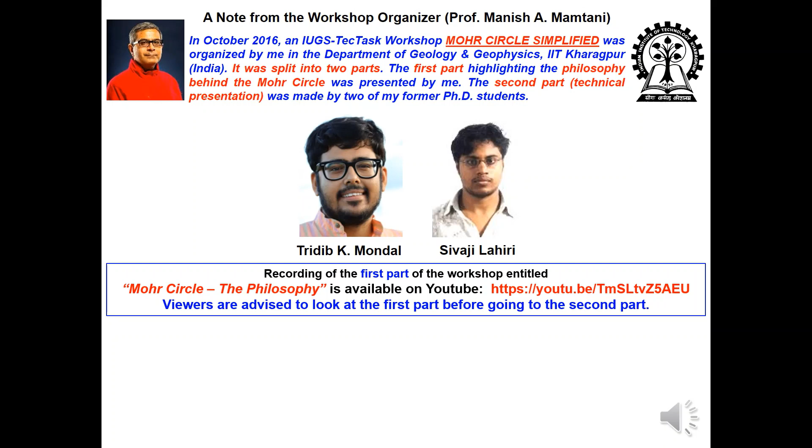Recording of the first part of the workshop, entitled Mohr Circle: The Philosophy, is available on YouTube, and the link is given here. Viewers are advised to watch the first part before the second part. This present recording deals with the second part, Mohr Circle Simplified, with detailed presentations by Tridib Mondal and Sivaji Lahiri.

The viewer is informed that Mohr Circle Simplified was one of two workshops originally held at IIT Kharagpur in October 2016. The workshop manual is open access and can be freely downloaded from ResearchGate. This recording was done in September 2020 for the benefit of students and the geology community in response to increased online teaching due to the COVID-19 pandemic.

In these four years since 2016, a lot of research has been done by present and former members of the Fabric Analysis Lab in the Department of Geology and Geophysics, IIT Kharagpur, as well as by other researchers worldwide on various aspects related to the Mohr circle and its applications. However, the present lecture deals largely with fundamental concepts and has been kept unaltered.

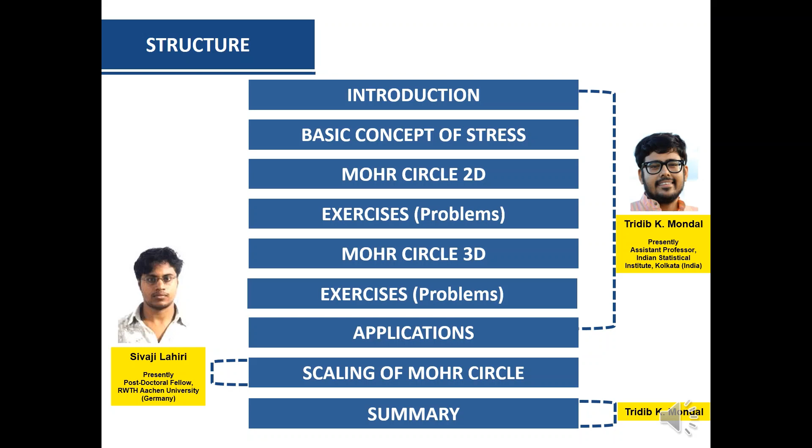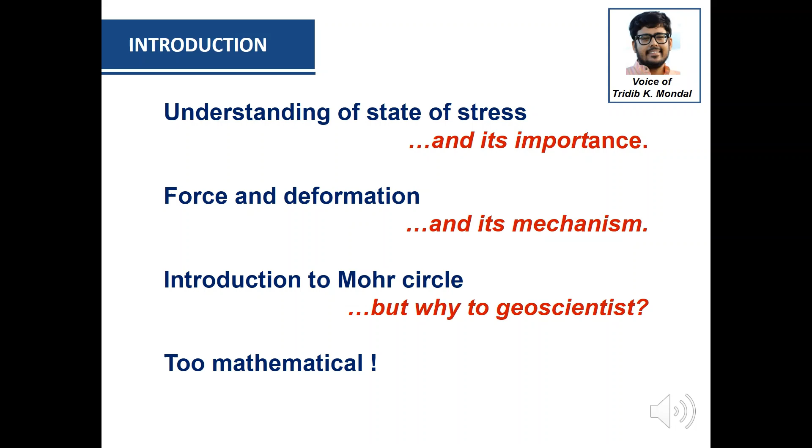Now coming to the introduction part, it is very important to understand the state of stress and its importance. When we talk about the state of stress, it is essential to know about force and deformation. Here we will introduce the Mohr circle. Now the question is, why is it important to geoscientists? In this lecture we'll try to find the answer to these questions. Some people think this is too mathematical, with lots of equations. Yes, there are some equations, but it is very important to understand the physical significance of these mathematical equations.

Now coming to the basic concept of stress. The Mohr circle, as I was telling you, is a graphical representation of any state of stress within the crust of the Earth. It was developed by German scientist Otto Mohr in 1882, after whom the graphical method is now named. So it's a graphical representation of normal stress versus shear stress.

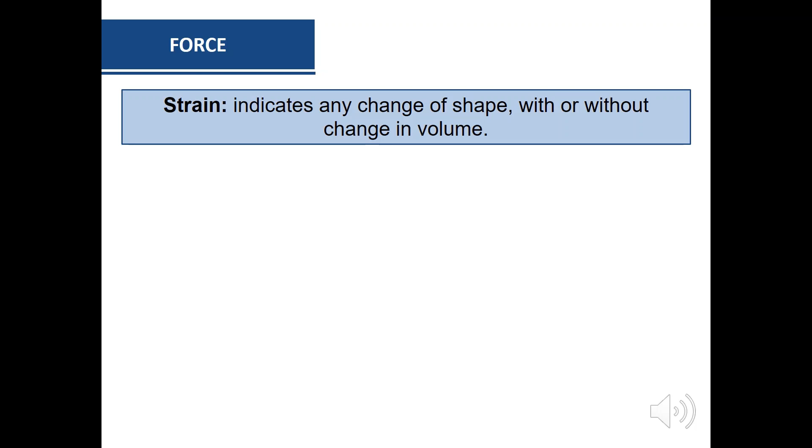Now coming to force or pressure. In the field we can't see the force or pressure directly, but we can see the strained body. Strain defines any change of shape. It may incorporate volume or it may not. If it incorporates volume, then we call it volumetric strain. So it's basically a change of relative position of particles in rocks in response to force.

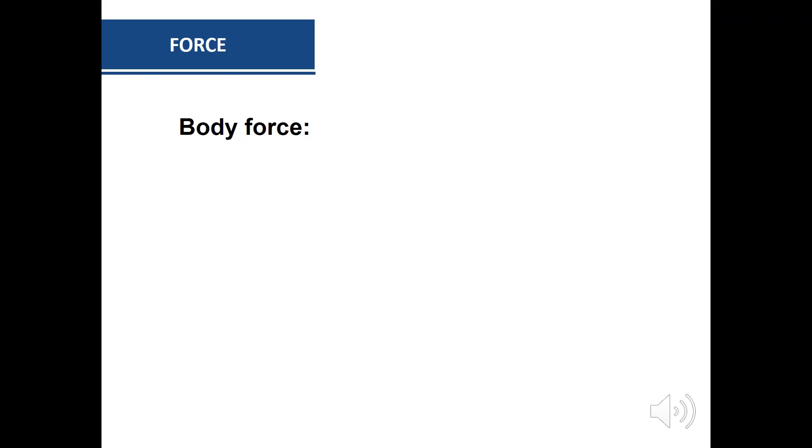So force is the main culprit. Force is defined as any pull or push applied to a body or material. Now coming to force, there are two types: one is called body force and another is called surface force. Body force defines the three-dimensional forces.

Body force affects every particle of rock in a volume, and its magnitude is related to its mass. You can consider gravity and magnetic forces as part of body force.

Now coming to surface force, it acts on the surface in the body. It results from the action of one body on another across a common surface.

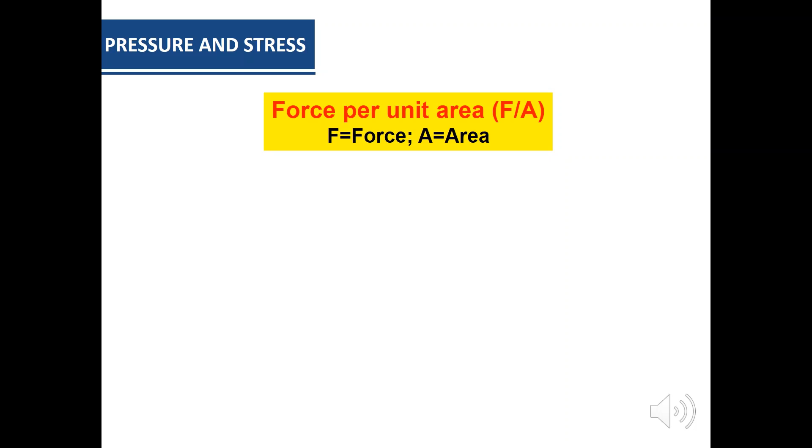Now coming to pressure and stress. As you know, pressure or stress are almost similar and both are defined by force per unit area. But there are slight differences between them. Pressure is used for materials with negligible shear stress, such as water or oil, whereas stress is used for materials with considerable shear stress, such as rock.

So to understand rock deformation, it is essential to understand this concept. Now coming to the units of stress, normally we express stress as Pascal, bars, or kilobars.

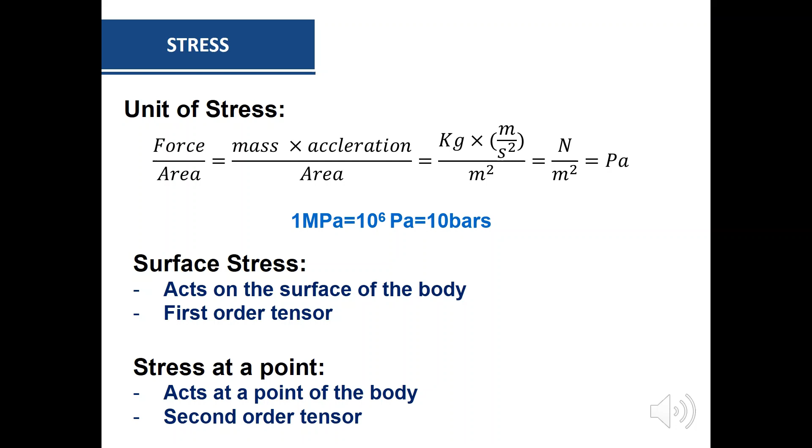Now there are two important terms: one is surface stress, and the other is stress at a point. Surface stress acts on the surface of the body and is considered a first order tensor, while stress at a point is defined when the stress is acting at a point of the body, and it is defined as a second order tensor.

Now, stress on a surface. Stress on a surface is a vector quantity, normally expressed by the symbol sigma, and can be expressed as the ratio between force per unit area across which the force acts.

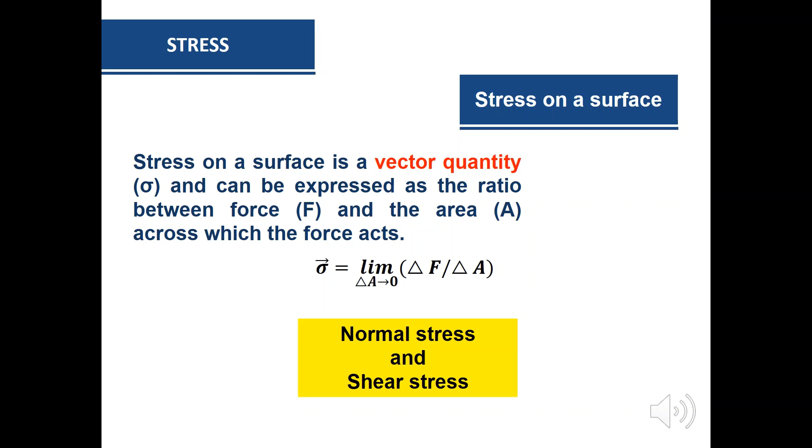So any force has two components: the normal stress component and the shear stress component. Normal stress and shear stress can be expressed as a function of theta, the orientation of the plane on which the force is acting. The normal stress, sigma n, is expressed as sigma cos square theta, while the shear stress, sigma s, is expressed as sigma sine 2 theta by 2.

So here the force F is acting on the plane, and the inclined line in that figure is a fracture plane. If we resolve the normal stress component and the shear stress component, and rearrange all these equations, we get the normal stress sigma n and shear stress sigma s as a function of cos theta and sin theta respectively.

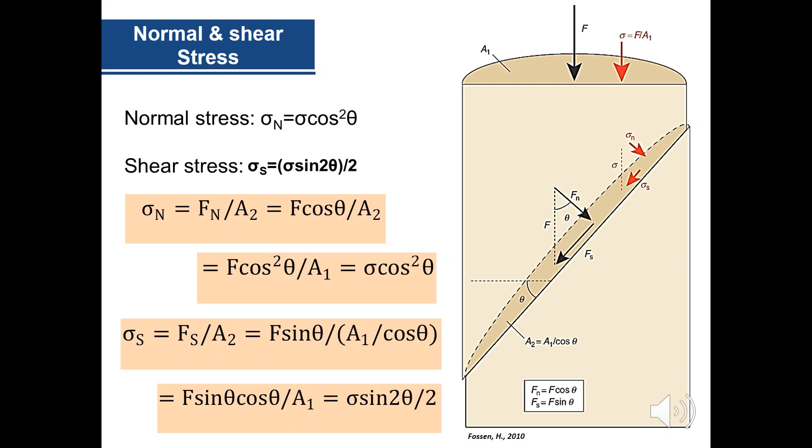Now there are some sign conventions, important to understand before the Mohr circle. From a structural point of view, we consider compressive stress as positive, while extension or tensile stress is negative. Anticlockwise rotation we consider sinistral and positive, while dextral, clockwise rotation, we consider negative.

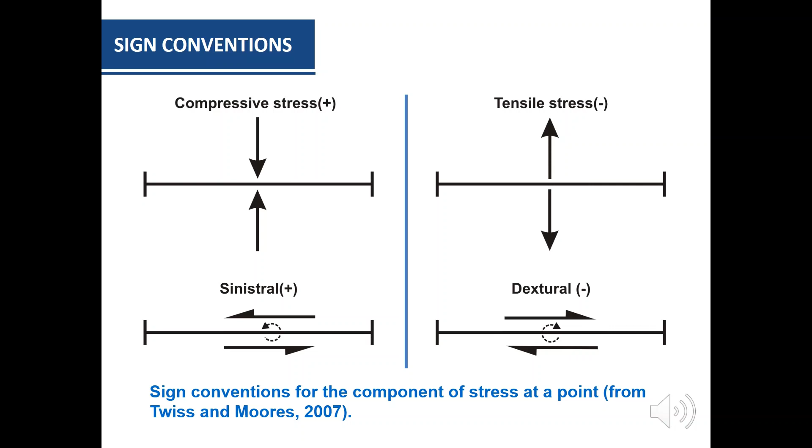Now, stress at a point. Stress at a point is expressed three-dimensionally. It is considered that stress components act on each surface of a very small cube, and each surface has a normal stress and a shear stress vector.

Here is a very small cube placed in x1, x2, x3 coordinates, with normal stresses and shear stresses plotted on each surface. For example, sigma 33 is a normal stress acting parallel to the x3 axis, perpendicular to the x1-x2 plane. In case of sigma 32 or sigma 31, both these stresses are shear stresses, parallel to the x1-x2 plane.

Now, in case of sigma 32, this shear stress acts on the plane which is perpendicular to the x3 axis and parallel to the x2 axis.

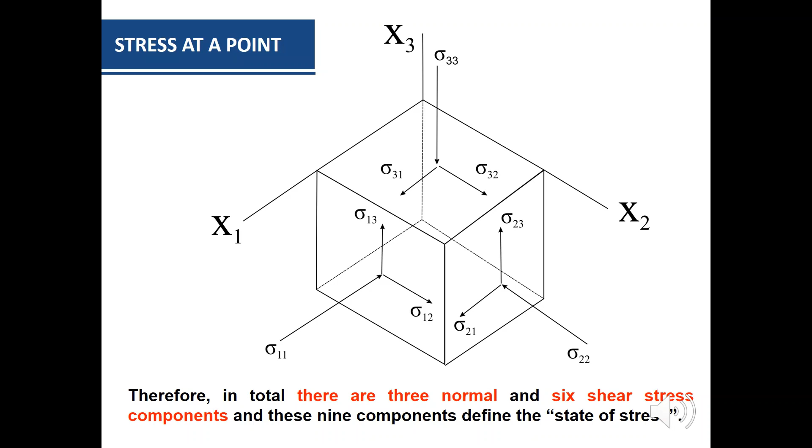Similarly, for sigma 31, this is the shear stress acting on a plane which is perpendicular to the x3 axis but parallel to the x1 axis. Similarly, sigma 23, sigma 21, sigma 13, and sigma 12 will be expressed. By resolving all the normal stresses and shear stresses acting on this very small cube, we can obtain these 9 stress vectors, represented by this stress matrix, normally denoted sigma ij.

The diagonal components of this matrix are the normal stress components, that is sigma 11, sigma 22, and sigma 33. All other 6 components are considered shear stress components.

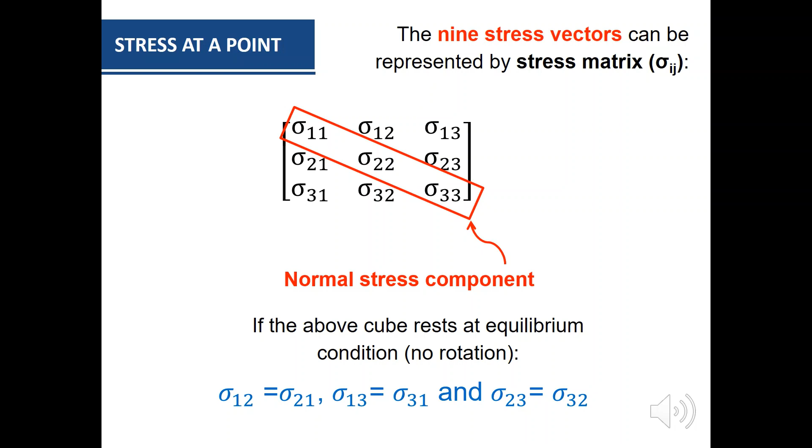Now consider the situation where the cube rests at equilibrium, meaning it doesn't suffer any rotation. In that case, we can write sigma 12 equals sigma 21, sigma 13 equals sigma 31, and sigma 23 equals sigma 32. So there are 6 independent components to the stress matrix, giving a symmetric stress matrix, where changing columns to rows doesn't change anything.

So again, these are the normal stress components. Coming to the principal stress, this is very important.

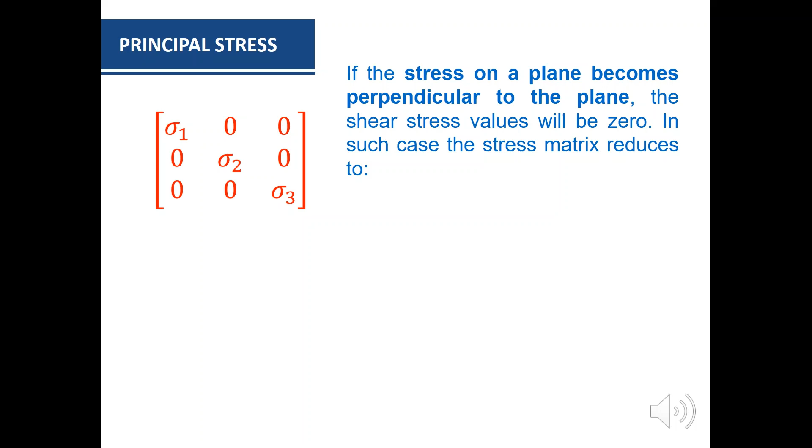If the stress on a plane becomes perpendicular to the plane, the shear stress value will be 0. In such a case, the stress matrix reduces to these components, where you can write sigma 11, sigma 22, sigma 33 - only diagonal axes are there, while the shear stress components are 0. So in the above matrix, sigma 1 or sigma 11, sigma 2 or sigma 22, and sigma 3 or sigma 33 are known as principal stresses, where sigma 1 is greater than or equal to sigma 2, which is greater than or equal to sigma 3.

The principal axes of stress are known as the major, intermediate, and minor axes of an ellipsoid. This ellipsoid is known as the stress ellipsoid.

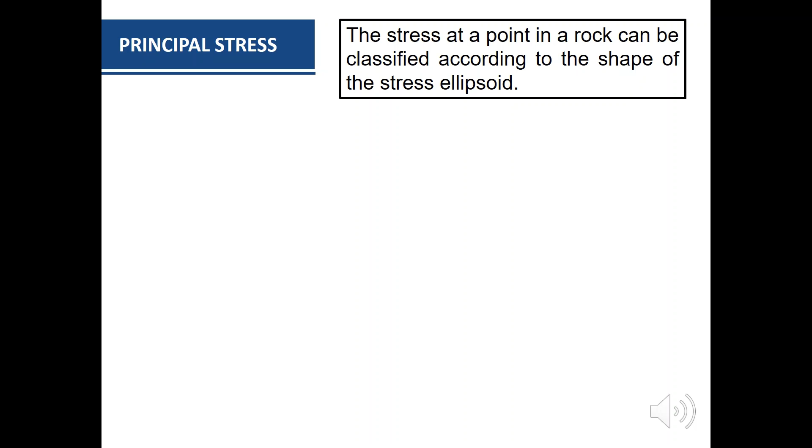Now the stress at a point in a rock can be classified according to the shape of the stress ellipsoid. It could be triaxial stress, biaxial stress, uniaxial stress, or hydrostatic stress. In triaxial stress, it's a state of stress in which all 3 principal axes are non-zero, meaning sigma 1, sigma 2, and sigma 3 are not equal to 0.

In biaxial stress, only 2 principal axes are non-zero while one will be 0. In uniaxial stress, only one principal axis is non-zero while the other 2 axes will be 0. In hydrostatic stress, the stress ellipsoid is a perfect sphere, meaning sigma 1 equals sigma 2 equals sigma 3, and there is no shear stress component.

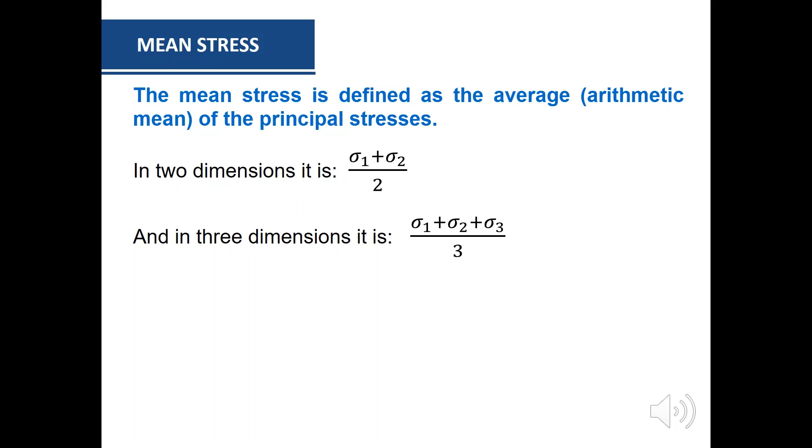Now there is one more important term called mean stress. Mean stress is defined as the average of the principal stresses. In 2 dimensions, it is sigma 1 plus sigma 2 divided by 2, and in 3 dimensions, it is sigma 1 plus sigma 2 plus sigma 3 divided by 3.

Mean stress is independent of any coordinate system, and in the lithosphere, mean stress is equivalent to lithostatic pressure, which can be expressed as rho g h. Rho is the average density of the crust, h is the height of the crust, and g is the gravitational acceleration.

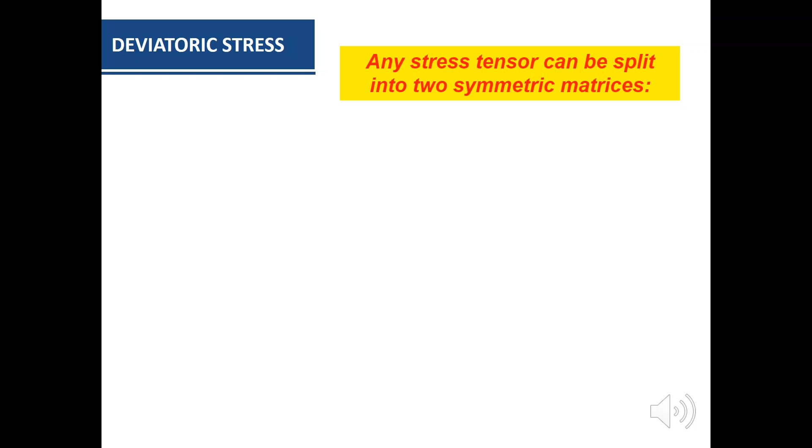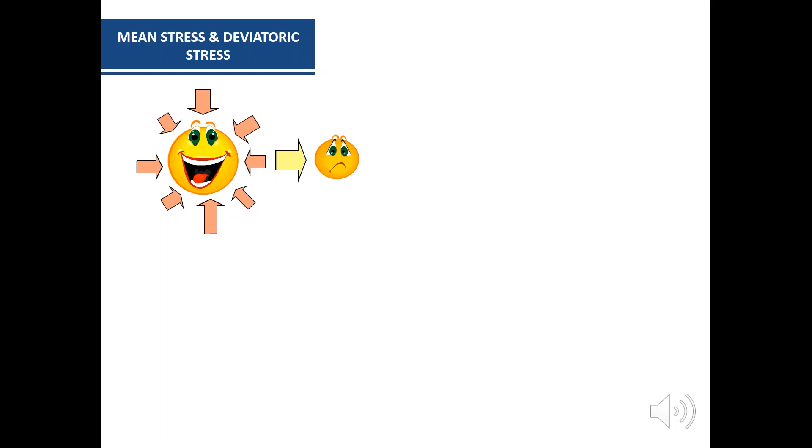Now, what is the physical significance of mean stress and deviatoric stress? We'll try to see from this cartoon diagram. Now, what happens if the mean stress increases? If mean stress increases, shape remains same but size changes.

But if the deviatoric stress increases, then shape changes while size remains same. So mean stress is considered the isotropic component of stress, while deviatoric stress is considered the anisotropic component of stress. The deviatoric stress typically represents the tectonic stress component, while the isotropic component corresponds to the lithostatic pressure. Commonly, the isotropic component is much larger than the deviatoric component.

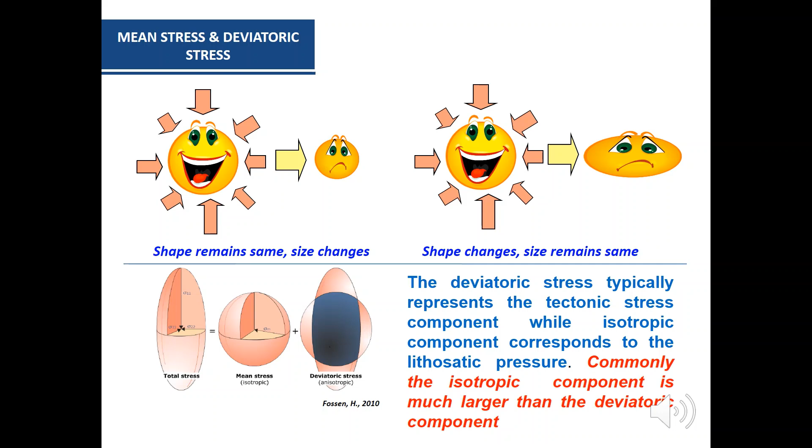So far, we have seen what normal stress and shear stress are, what mean stress and deviatoric stress are, and the physical significance of mean stress and deviatoric stress. Now we'll see one exercise, and this will essentially help us clarify the concept of normal stress and shear stress.

The exercise is given here: a cylindrical specimen of rock with 50 millimeter diameter and 100 millimeter long is subjected to an axial compression force of 5 kilonewton, and we have to determine the normal stress and shear stress on a plane inclined at 30 degree to the radial direction, the maximum values of the shear stress, and the inclination of the planes on which the shear stress is equal to 1/2 of the maximum shear stress.

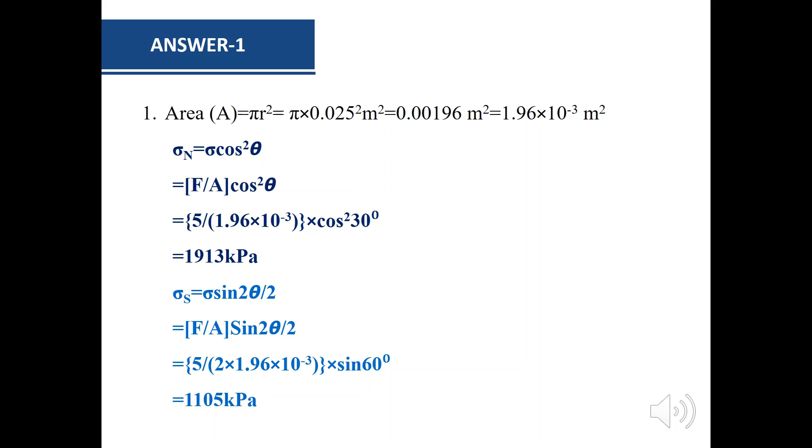Now let's look at the answer for the first one. Normal stress is equal to sigma cos square theta, this is known to us. Sigma is force per unit area, so area we can determine from the given data, and we know theta is 30 degree. By converting all the units, we get sigma n equal to 1913 kilopascal. Similarly, we can determine the shear stress sigma s, that is 1105 kilopascal.

Now for the second part of the question, we have to determine the maximum shear stress. Maximum shear stress occurs when theta is equal to 45 degree. If you put theta equal to 45 degree, we can easily get the value of maximum shear stress. Here we have received that is 1275 kilopascal.

After completing the basic concept of stresses, we will move towards the Mohr circle. First we will try to learn Mohr circle in 2D, then we will come to Mohr circle in 3D. To start with, we have to know that the concept of stress can be extrapolated to understand the state of stress at a point in 3D by visualizing a stress ellipsoid. It is necessary to know the magnitude and orientation of all the normal stress and shear stress on every plane that includes that point. Mohr's circle provides a graphical means of calculating normal and shear stresses and the orientation of a plane in rocks.

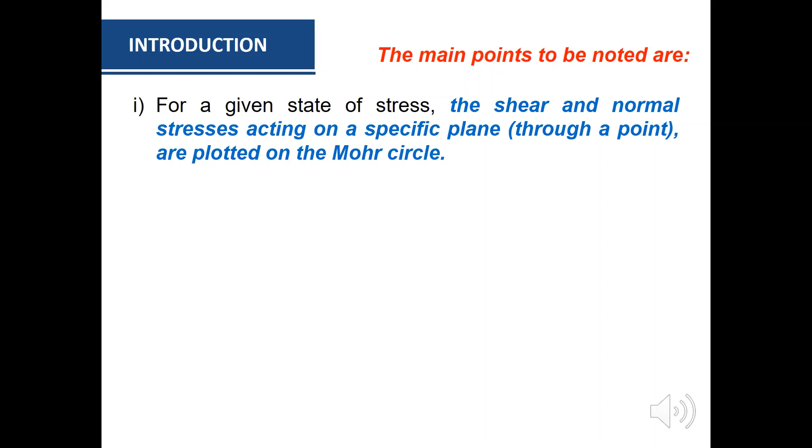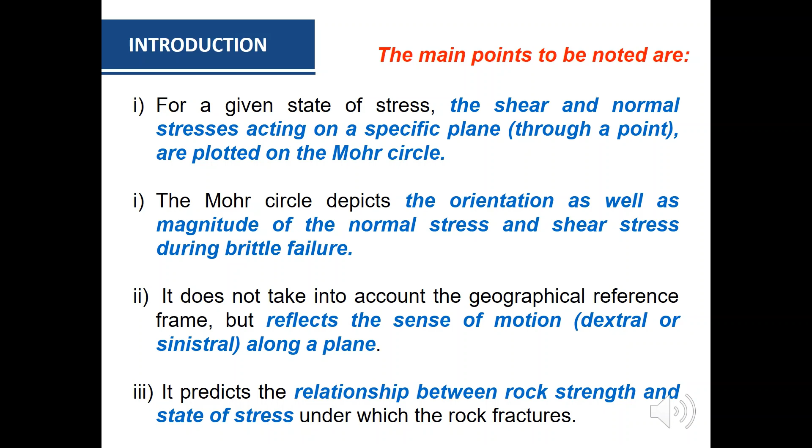There are certain points which are very important and we have to note down. For a given state of stress, the shear stress and normal stresses acting on a specific plane through a point are plotted on the Mohr's circle. The Mohr's circle depicts the orientation as well as magnitude of the normal stress and shear stress during brittle failure. Number 3, it doesn't take into account the geographical reference frame but reflects the sense of motion, either dextral or sinistral, along a plane. And finally, it predicts the relationship between rock strength and the state of stress under which the rock fractures.

The magnitude of stress varies with the orientation and size of the area on which the force is acting, because stress is defined by force per unit area. So to determine the equation of Mohr circle, there are certain assumptions.

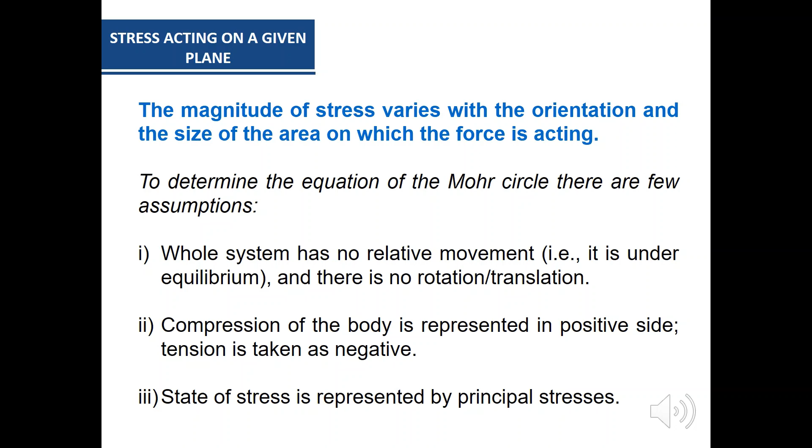What are these assumptions? The assumptions are the whole system has no relative movement, it is under equilibrium and there is no rotation or translation. Compression of the body is represented on the positive side, tension is taken as negative side, and the state of stress is represented by principal stresses.

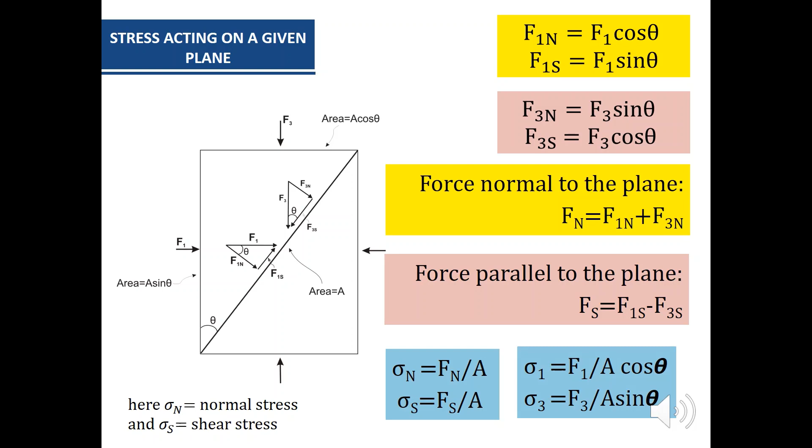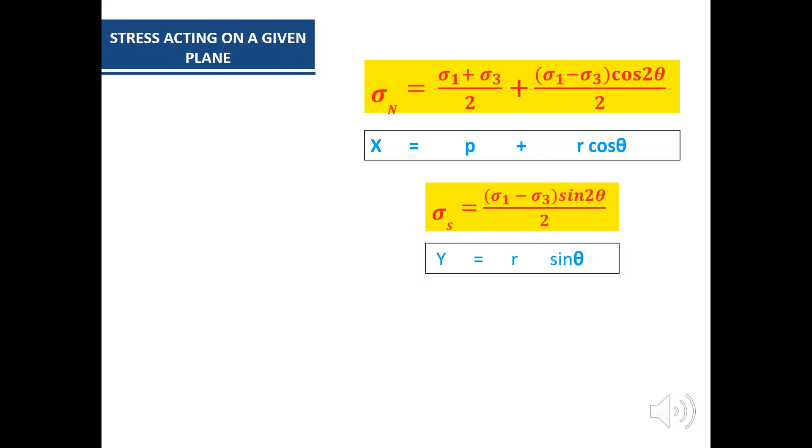Now if we look at the equations of normal stress and shear stress very closely, we can see the normal stress and shear stress equations are equivalent to the equations of a circle, where normal stress equations can be equivalent to x equals p plus r cos theta, whereas the shear stress equations can be equivalent to y equals r sin theta, where r is the radius of the circle, and the center of the circle on the horizontal axis would be at sigma 1 plus sigma 3 by 2, 0, and the radius is sigma 1 minus sigma 3 by 2.

So the sigma 1 plus sigma 3 by 2, we know this is the mean stress. So in two dimensions, the center and the radius of the Mohr circle is represented by the mean stress and deviatoric stress component of the stress matrix respectively.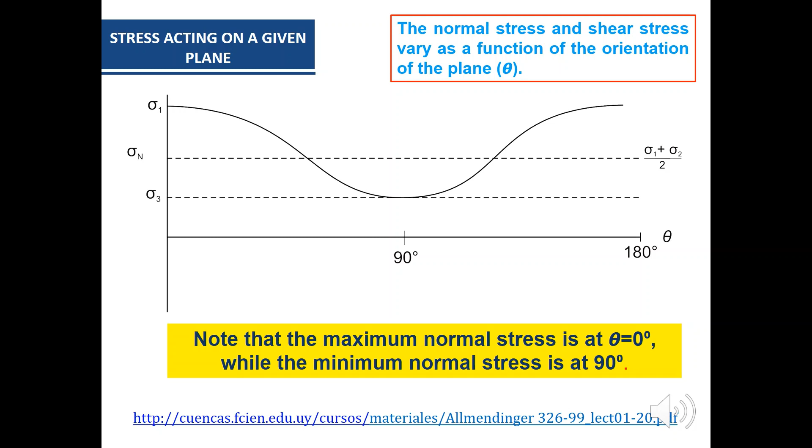Now if you see the change of normal stress and shear stress with the change of theta, we can see that when theta is equal to 0 degree, the normal stress is maximum, then it will decrease as theta increases.

Similarly, when we see shear stress as a function of theta, we can see that shear stress is minimum when theta is equal to 0 degree, because shear stress is a function of sin 2 theta. Then as theta increases, shear stress increases and reaches maximum when theta is equal to 45 degree. This is how normal stress and shear stress increase or decrease with the increase of theta, that is, the orientation of the fracture plane.

So the orientation of the fracture plane, or the plane on which the forces are acting, is very important. Now we'll see how to draw a Mohr circle, and how a plane is represented in the Mohr circle or Mohr space.

Consider that there is an inclined plane, represented here through a bold black line, and sigma 1, the maximum principal stress, is acting vertically, making theta angle with the pole to this fracture plane. Now we will try to plot this plane into this Mohr space.

To start with, first consider two axes: the normal stress axis and shear stress axis. Generally normal stress axis is plotted horizontally parallel to the x-axis, while shear stress axis is plotted parallel to the y-axis vertically. In 2D, if we consider sigma 1 is maximum principal stress and sigma 3 is minimum principal stress, we can plot sigma 1 and sigma 3, and we can also draw a circle through sigma 1 and sigma 3.

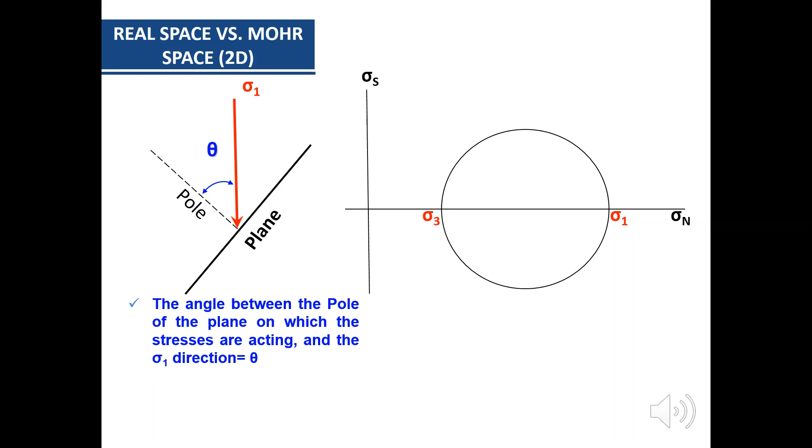But when all these principal stresses are plotted into the Mohr space, they will be doubled. So whatever angle we measure in the real space will be doubled in the Mohr space. Here in the real space, theta is measured from sigma 1 to the pole to this fracture plane, so from sigma 1 we can take 2 theta angle to plot the pole to the fracture plane.

So the Mohr circle describes the normal and shear stress acting on the planes of possible orientation through a point in the rock. Now, what are the components of the Mohr circle?

Now, if you consider this is the Mohr circle, the diameter, that is sigma 1 minus sigma 3, would be the differential stress, that is the difference between the maximum principal stress and the minimum principal stress. And the center is sigma 1 plus sigma 3 by 2 on the normal stress axis, so this is the mean stress. While the radius, that is sigma 1 minus sigma 3 by 2, would be the deviatoric stress component.

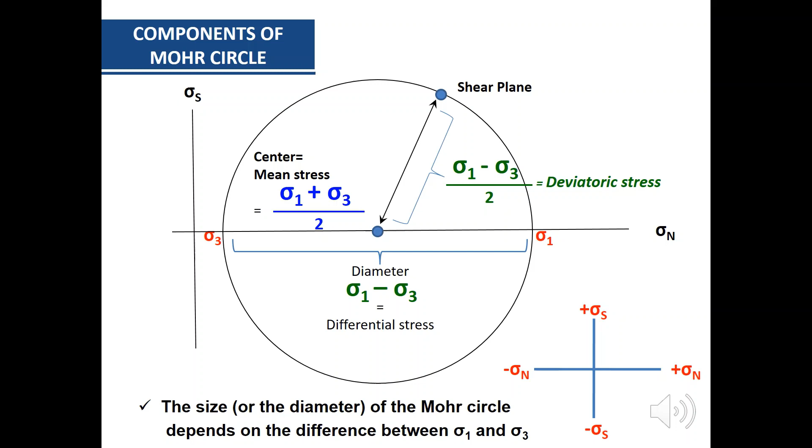Now we'll see what happens to the position of the Mohr circle if we change or increase the mean stress. Mean stress is defined by the center of the circle, that is sigma 1 plus sigma 3 by 2. So if we increase the mean stress, it will definitely move towards the right hand side, which has great implications in understanding the stability of the rock. I'll come to this shortly.

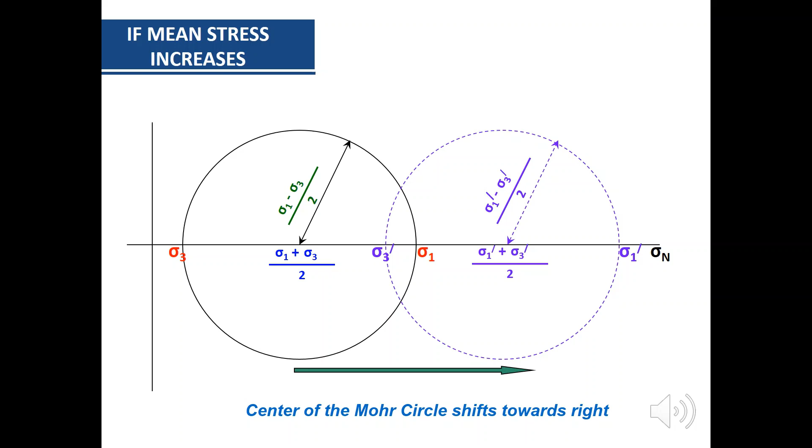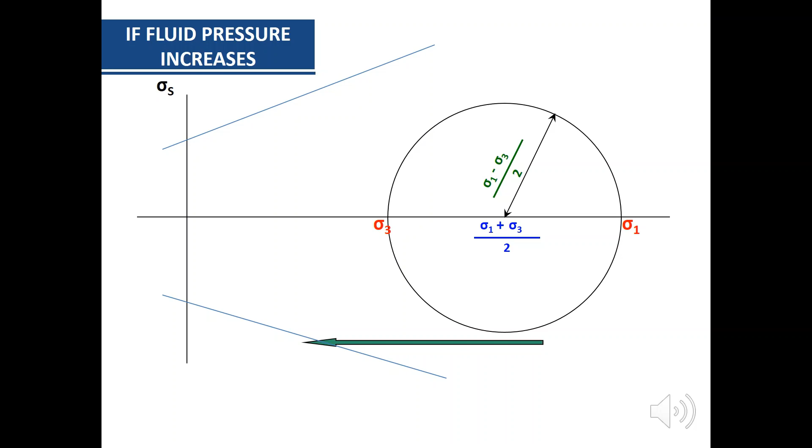Now what happens if fluid pressure increases? If fluid pressure increases, it essentially decreases the mean stress component. When the mean stress decreases, the Mohr circle will shift towards its left hand side. Once it touches these two inclined lines called the fracture envelope—I'll come to this very shortly—if it touches the Mohr circle, then the shear fracture will form.

Now there are different types of stresses which are commonly used. The first one is general tension, where we can see the Mohr circle is on the negative side. The second one is uniaxial tension, where one axis is zero and you have one non-zero value on the negative side.

The third one is general tension and compression, which has both compressive and tensional values, or positive sigma 1 and negative sigma 3. The fourth one is pure shear stress, and uniaxial compression, which is just the opposite of uniaxial tension. The last one is general compression.

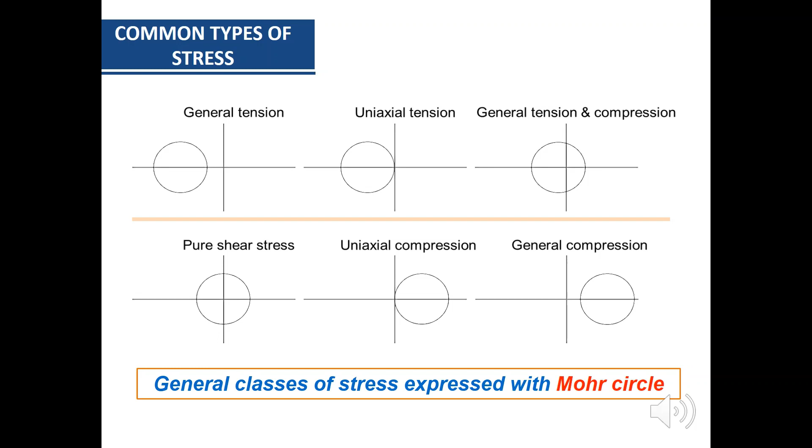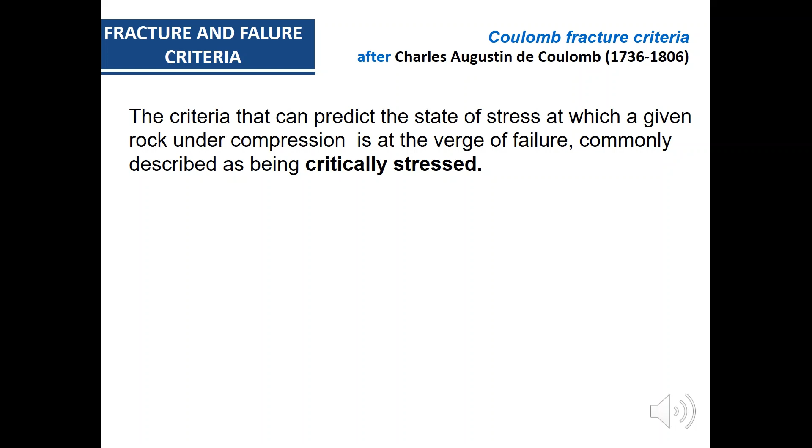Now we'll talk about the fracture and failure criteria, also known as the Coulomb fracture criteria. This criteria predicts the state of stress at which a given rock under compression is at the verge of failure, commonly described as being critically stressed.

The relation between shear stress and normal stress can be represented by the angle of internal friction, phi. So sigma s, the shear stress, is equal to sigma n tan phi, where tan phi is the coefficient of internal friction, also represented by mu.

A fracture criteria describes the critical condition at which the rock fractures. The Coulomb fracture criteria can be interpreted as a straight line in Mohr space, with mu representing the slope and phi the slope angle. Here, sigma s equals sigma n tan phi is equivalent to y equals mx, the equation of a straight line.

Now the fracture only forms if the internal strength or cohesion is exceeded. Therefore, the complete Coulomb fracture criteria is shear stress equals C, the cohesion, plus sigma n tan phi, or C plus sigma n mu, since mu equals tan phi. This is equivalent to the equation of a straight line, y equals mx plus c. Here, c is the shear stress along the surface when normal stress equals zero; c is known as the cohesive strength.

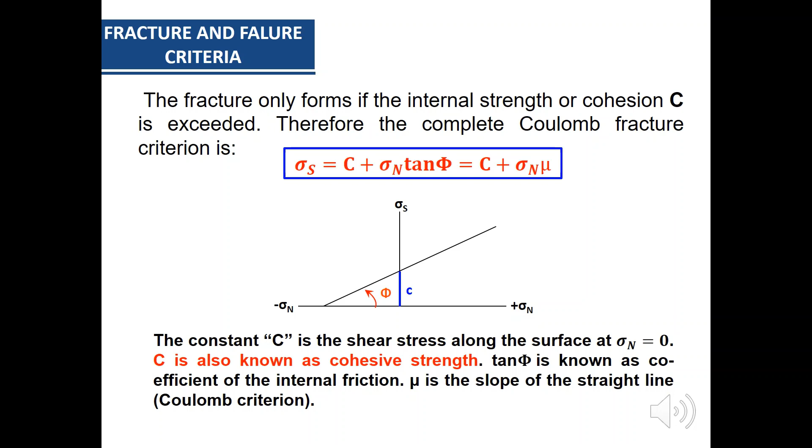Tan phi is known as the coefficient of internal friction, and mu is the slope of the straight line. The cohesive strength C and angle of internal friction phi are internal properties of the rock, and therefore vary from one rock type to another.

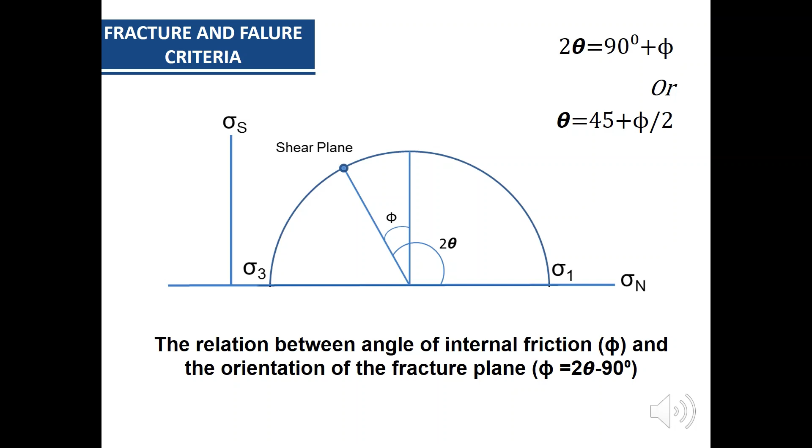The difference between 2 theta, at which the fracture forms, and 90 degrees gives the angle of internal friction phi. Here we see the relation between the angle of internal friction phi and the orientation of the fracture plane: 2 theta equals 90 degrees plus phi, or theta equals 45 degrees plus phi by 2.

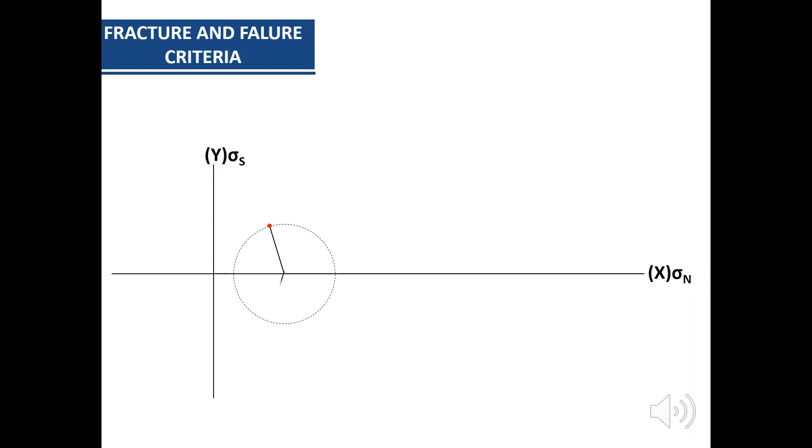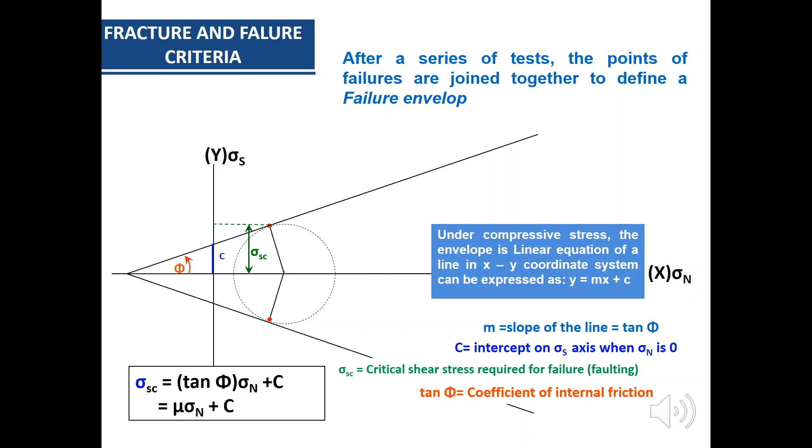After a series of tests, the points of failure are joined together to get the failure envelope of a particular material. Where this failure envelope cuts or meets the normal stress axis, the angle between the envelope and the normal stress is phi, the angle of internal friction, and m is the slope of the line, that is tan phi. C is the intercept on the shear stress axis when normal stress is 0, and the critical shear stress, sigma SC, marked in green, is the shear stress required for failure or faulting. So the critical shear stress sigma SC is equal to mu sigma n plus C.

We have seen that the Coulomb fracture criteria predicts the critical state of stress needed to create shear fracture, but that is in the compressive regime. What about the tensile regime? Is this failure criteria valid there? The Coulomb fracture criteria does not predict tensile fracture, because the Coulomb envelope relies on the angle of internal friction, which is physically meaningless for tensile normal stress. Experiments suggest the Mohr envelope in the tensile regime is shaped like a parabola.

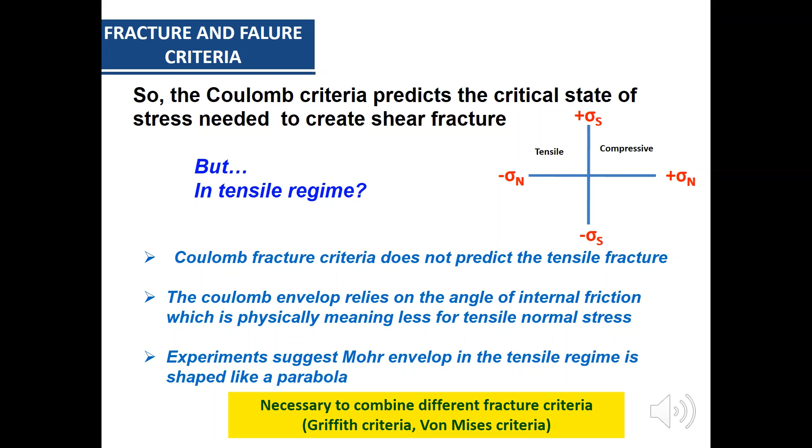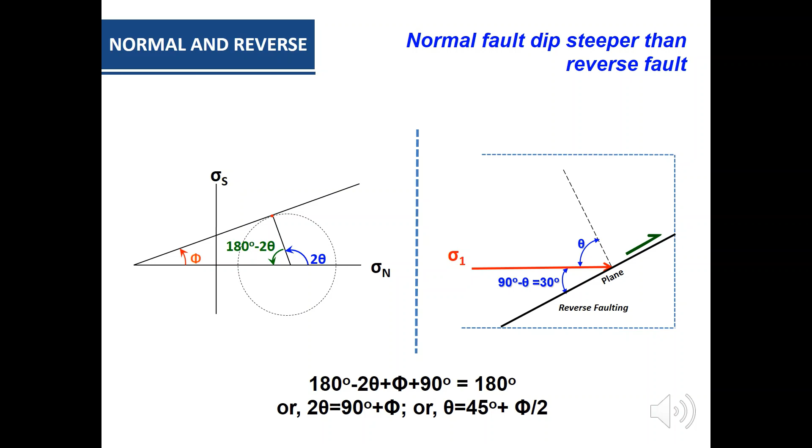So far we have seen how the Mohr circle is plotted, and how a fracture plane or any plane is represented through the Mohr circle. We have also seen the different fracture criteria and how they are predicted. Now we'll do one exercise, which will clear the idea about the Mohr circle.

We know the values of sigma 1 and sigma 3, so we can plot the positions of sigma 1 and sigma 3 on the normal stress axis, and we can calculate theta, the orientation of the fracture plane. With all this data, we can graphically plot the fracture plane, and from this graph determine the normal stress and shear stress values.

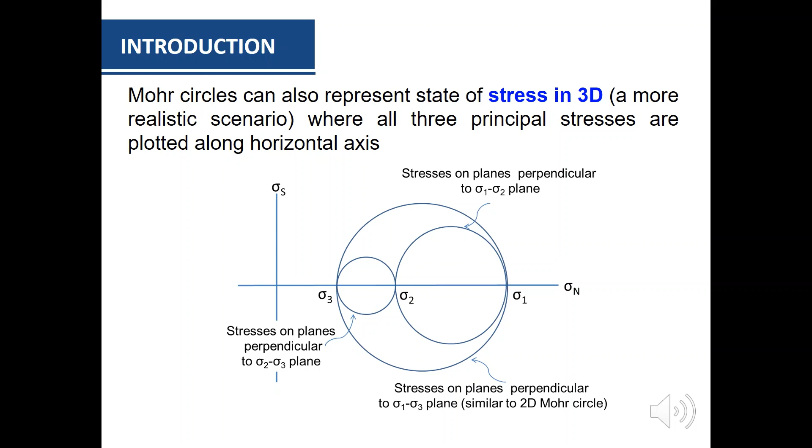Now we'll move to the Mohr circle in 3D. When we talk about the Mohr circle in 3D, we work with three principal stress axes: sigma 1, sigma 2 and sigma 3. Since sigma 2 is the intermediate principal stress, it will be plotted between sigma 1 and sigma 3, and in that case we'll have three circles. One through sigma 1 and sigma 3, the second through sigma 1 and sigma 2, and the third through sigma 2 and sigma 3.

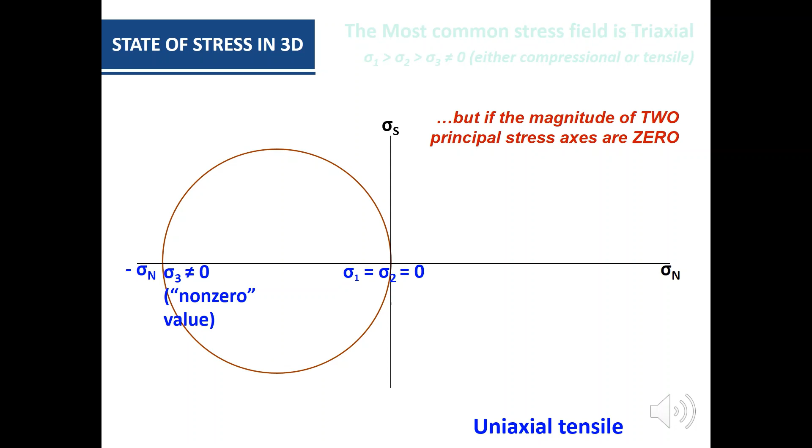Now, what happens if the magnitude of two principal axes are 0? The Mohr circle will shift towards the left. Here sigma 2 is equal to sigma 3 is equal to 0, so only one non-zero value, sigma 1, remains. This condition is called uniaxial compressive. The opposite case, uniaxial tensile, has sigma 1 and sigma 2 equal to 0, with one non-zero component, sigma 3, which is on the negative side. This is the condition of uniaxial stress, the first one.

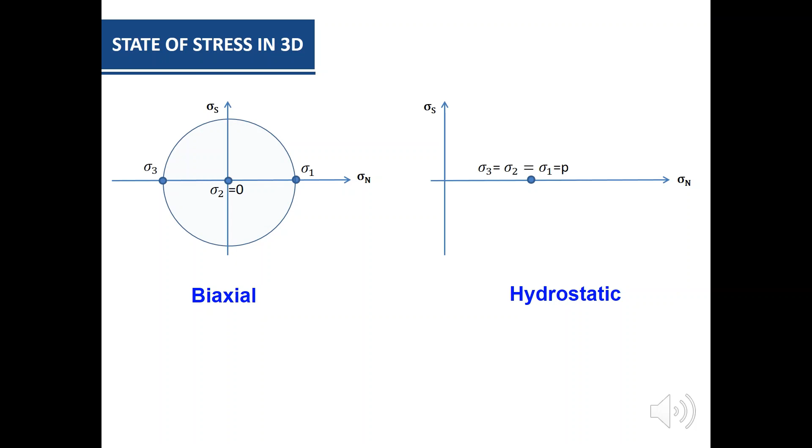The second one is the biaxial stress, where only sigma 3 and sigma 1 are non-zero values. In the first biaxial condition, sigma 1 and sigma 3 have non-zero values while sigma 2 is 0, with sigma 1 on the positive side and sigma 3 on the negative side. In the second figure, sigma 1 equals sigma 2 equals sigma 3, so all principal stresses are equal. This is the condition of hydrostatic stress.

Here we can see the different states of stress and the corresponding matrix, from hydrostatic stress to uniaxial compression to uniaxial tension, axial compression, axial extension, and the triaxial stresses.

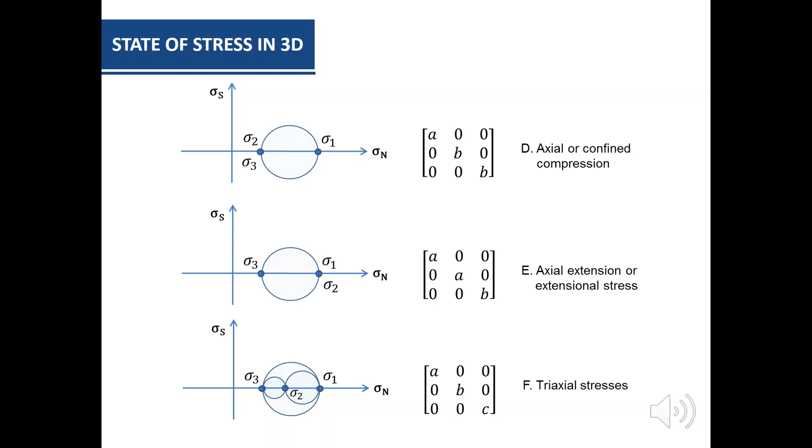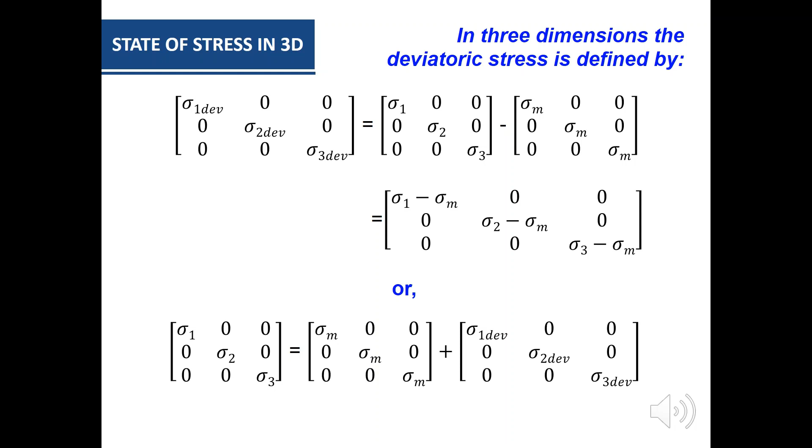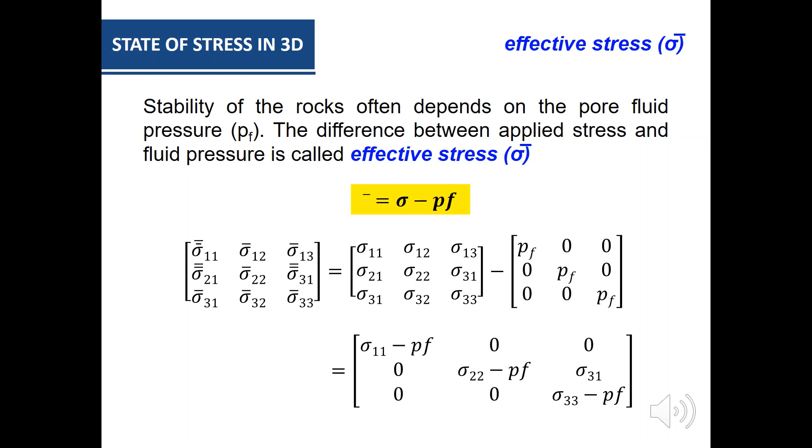That is the mean stress component, and the anisotropic stress component, that is the deviatoric stress component. Now, if the fluid pressure increases, as I was telling earlier, the mean stress will decrease and the Mohr circle will shift towards its left hand side. So that means the effective normal stress would be the total stress minus the fluid pressure.

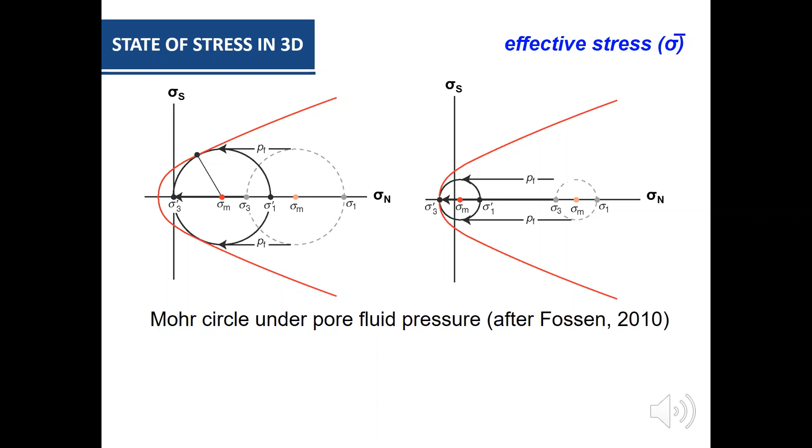This implies that the rock can be deformed under pore fluid pressure even if the differential stress remains constant, because it essentially moves the Mohr circle towards the left hand side, and if it touches the Mohr envelope, the material will fail. Both shear fracture and tensile fractures can occur under the effect of fluid pressure. The shear fracture will form if the circle touches the Mohr envelope, and a tensile fracture forms if the envelope is reached in the tensile field. The fluid pressure can create fractures even at very low differential stress.

Now we'll see another exercise on this effective fluid pressure condition. In a given fault plane, the principal stress magnitudes sigma 1 and sigma 3 are given, that is 50 megapascal and 31 megapascal at 0 pore pressure. The angle between normal to the fault plane and sigma 1 is given, that is 70 degrees. We have to determine the normal stress and shear stress. The rock has pre-existing fractures and the angle of internal friction is 39 degrees.

So the injection of water into the rock creates a pore fluid pressure of 27 megapascal. We have to determine the position of the new Mohr circle, because as we inject the pore pressure or water into the system, it will create the pore pressure and ultimately try to reduce the mean stress.

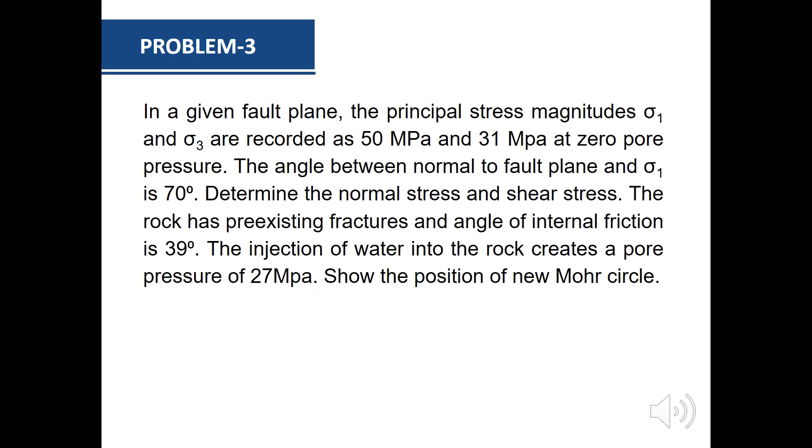Now let's see the answer to this question. Here you can see the Mohr circle is plotted with the help of the normal stress and shear stress values, and the Mohr envelope or failure envelope is also plotted with the help of the angle of internal friction. It may be noted that the rock has pre-existing anisotropy or pre-existing fractures, that means here the cohesion is considered as 0.

So when we inject the fluid pressure, 27 megapascal fluid pressure, the mean stress will reduce by 27 megapascal and ultimately it will shift towards the left hand side, and if it touches the failure envelope, the material will fail. Here we can see the new Mohr circle has already touched the failure line, which means the fracture is already developed. So this is the position of the new Mohr circle.

So this is all about the basics of the Mohr circle in 2D and 3D. Now we will see one application that has been applied on the Gadag belt, that is the volcano-sedimentary assemblages of the Archean greenstone belt, Dharwar Craton, South India, and we'll see how the vein orientation data are used to plot the 3D Mohr circle, and ultimately how that helps to comment on the fluid pressure condition.

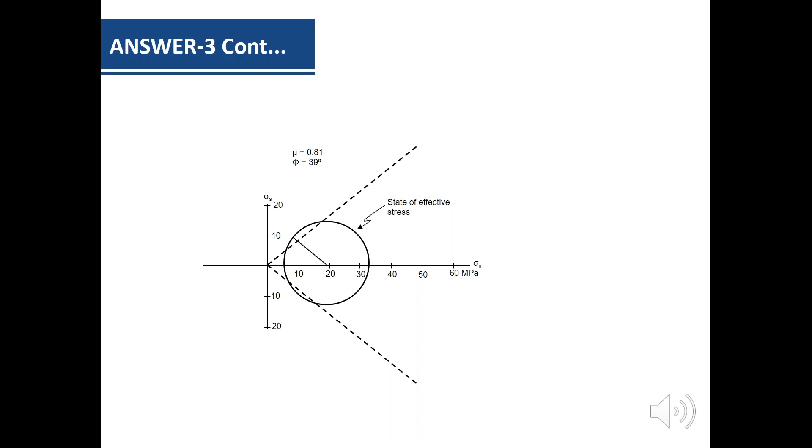The Mohr circle has been used to determine the magma pressure and fluid pressure condition during dike and vein emplacement respectively. The method to construct the 3D Mohr circle was developed first by Jolly and Sanderson in 1997 to examine the condition of stress and fluid pressure responsible for the opening of pre-existing fractures during dike emplacement.

Now, what are the conditions for new fluid-induced fracture formation or the reactivation of an earlier fracture? For that, the fluid pressure should be greater than or equal to the normal stress acting on the fracture plane. This was used earlier by Delaney et al. in 1986, who proposed the term driving stress ratio, as a function of fluid pressure and theta, the orientation of fractures. Subsequently, this has been evolved and used by Jolly and Sanderson with the help of the driving pressure ratio and the stress ratio.

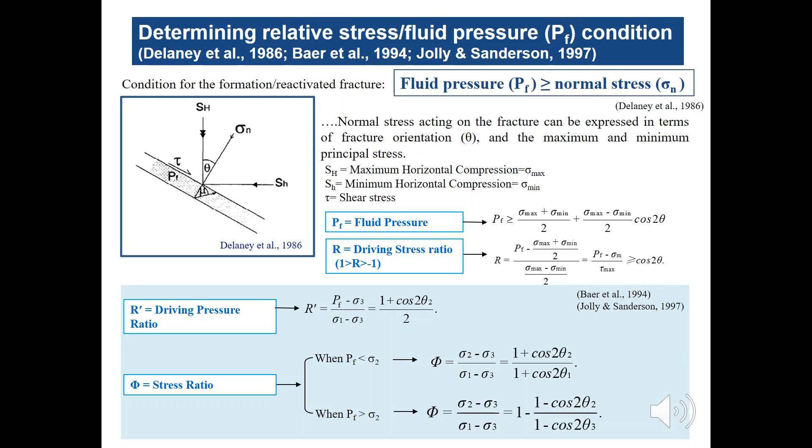In the first case, when the fluid pressure is equivalent to minimum principal stress, sigma 3, no fracture orientations are susceptible for reactivation. But as the fluid pressure increases, the range of orientations susceptible for reactivation increases. And when PF is greater than or equal to sigma 1, the maximum principal stress, all fracture orientations are susceptible for reactivation. At low fluid pressure, fractures of a restricted range of orientations get reactivated or dilated.

This is called the cluster distribution of poles to veins or fractures. At high fluid pressure condition, fractures with a wide range of orientations get reactivated or dilated, giving the girdle distribution of poles to veins or fractures.

Normally, if we get the cluster distribution of poles to veins or dike, we interpret, following Jolly and Sanderson, that fluid pressure is less than sigma 2, the intermediate principal stress. While we get the girdle distribution of poles to veins or dike, again following Jolly and Sanderson, we say fluid pressure is greater than sigma 2.

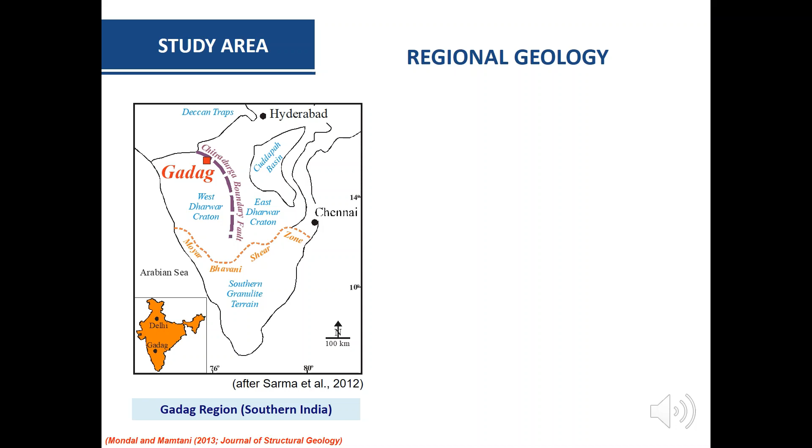Now look at an example from the Gadag belt as I was talking. We'll see how the vein orientation data are used to plot the 3D Mohr circle as well as the fluid pressure condition. These vein data are collected from the Gadag belt, which is part of the greenstone belt of Western Dharwar Craton of the Southern Indian Shield. This is the northern part of the Chitradurga belt.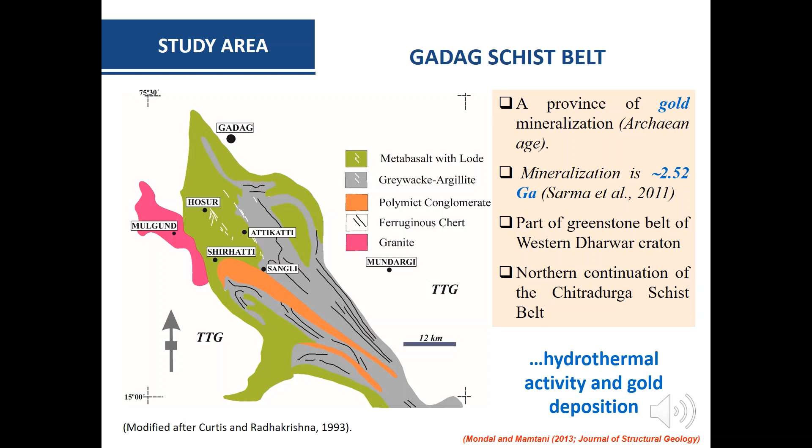This is the lithological map of the Gadag belt. It's a province of gold mineralization of Archean age, and the mineralization age is found to be 2.52 billion years. As I was saying, hydrothermal activity took place in that region, and gold deposition is associated with this hydrothermal activity.

These are the types of quartz vein recorded from that area. These quartz veins are essentially determined as extensional quartz veins. Sometimes they form a crisscross pattern, sometimes you can see a prominent median line. These are the orientations of veins found in that region, and the lower rose diagram shows the fracture orientation.

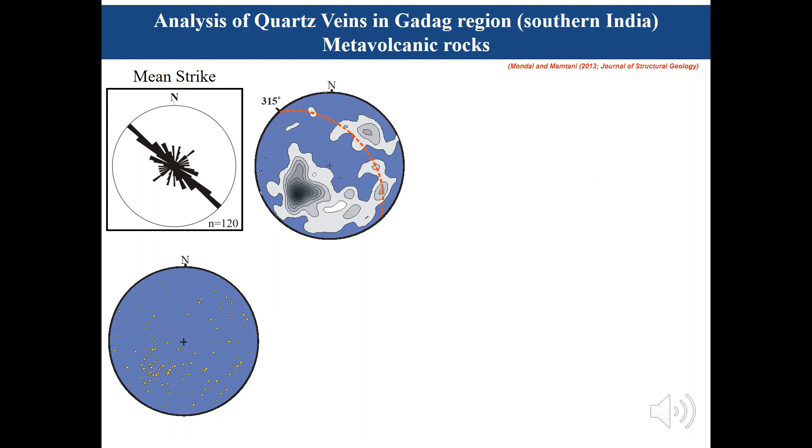Out of 296 vein data, there are 120 veins for which we could measure strike and dip direction. Therefore, we can plot the pole to these veins in the lower hemisphere equal area projection. Here, the red line indicates the mean vein orientation data, and from the distribution it is clear that it is a girdle type distribution.

That means the fluid pressure was greater than sigma 2. But we don't know how much it was greater than sigma 2. Let's have a look at this issue.

Once we confirm that this distribution is a girdle distribution, then following Jolly and Sanderson 1997, I can easily determine the position of the principal stresses and the range of orientation of fractures, that is theta. These help us determine the driving pressure ratio R' and the stress ratio phi. R' varies from 0 to 1, and here R' is 0.94, very close to 1, which signifies high fluid pressure condition. But we don't know how high it was.

So to know that, we have to plot this data into the 3D Mohr circle. From this stress ratio, we can easily plot the relative position of sigma 1, sigma 2, and sigma 3, and the range of orientation of fractures, theta. And if we get this range of orientation of fractures theta, we can determine the fluid pressure line joining 2 theta 2 and 2 theta 3.

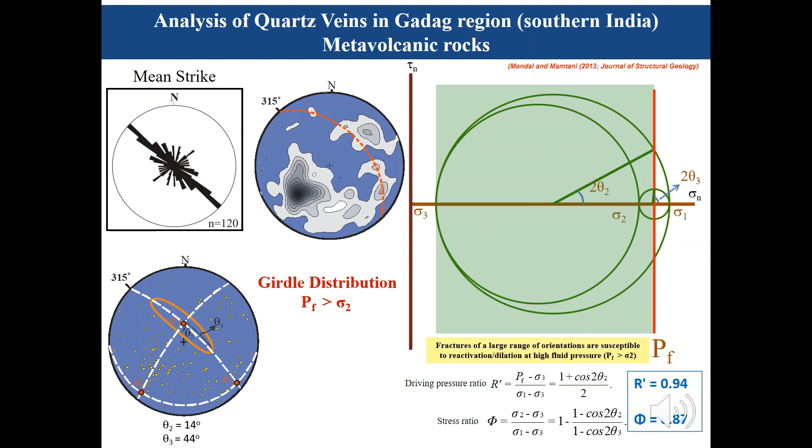Now if you see, although this is a girdle type distribution, at the southwest corner we can see a prominent cluster. So if we assume this is a cluster distribution, that means the fluid pressure was less than sigma 2. And again, following Jolly and Sanderson 1997, we can plot the relative position of principal stresses and the range of orientation of fractures theta.

Subsequently we can calculate R' and phi, the driving pressure ratio and stress ratio respectively. Here the driving pressure ratio is 0.07, very close to 0, which signifies low fluid pressure condition. But how low? To define that, we have to plot this data into the 3D Mohr circle.

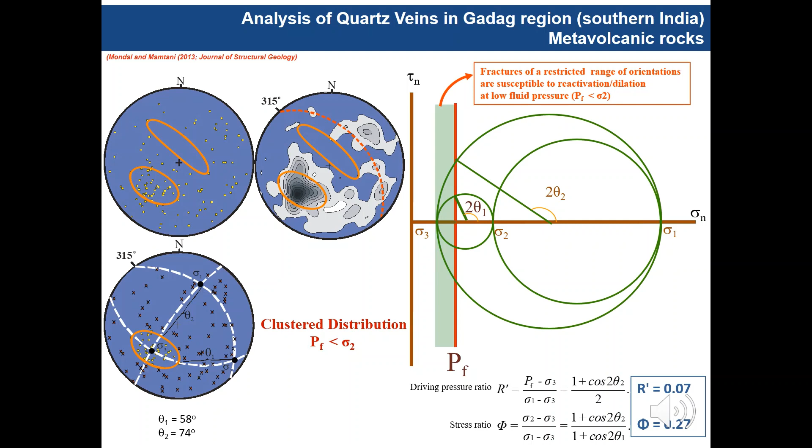Using stress ratio, we can plot the relative position of sigma 1, sigma 2, and sigma 3, and we can define the fluid pressure line joining 2 theta 1 and 2 theta 2. These are the range of orientations of fractures susceptible for reactivation or dilation at low fluid pressure condition. So we interpret that in the Gadag region, the fluid pressure has fluctuated from high to low fluid pressure, and at this low fluid pressure condition, only northwest-southeast oriented veins were susceptible for reactivation because the anisotropy lies in this direction.

So this was a very brief idea about the application of the Mohr circle. The details are given in Mondal and Mamtani 2013, Journal of Structural Geology paper. Now, we have seen how the Mohr circle is used to define the fluid pressure condition, but this is the unscaled Mohr circle. The next step would be the scaled Mohr circle, and that part will be taken by Sivaji Lahiri.

Hello, myself Sivaji Lahiri. In the beginning, Professor Mamtani introduced me, that I have done my PhD with him. So in this presentation, I am going to talk about scaling of the 3D Mohr circle.

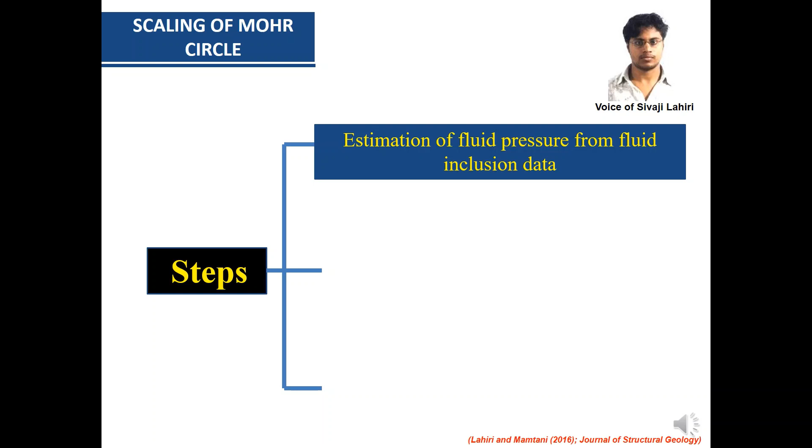The next step is approximation of the rock failure criteria using Hoek and Brown 1980. One point familiar to all of us is that to propagate any fracture or vein, it should exceed the tensile strength of the rock mass. So to exceed the tensile strength, and hence to scale the 3D Mohr circle, we need to approximate a rock failure criteria. In this study, we have considered the Hoek and Brown failure criteria. In a later slide, I will discuss why Hoek Brown failure criteria and not any other.

So the third step is fine adjustment. Once all of these steps are done, then we can scale the 3D Mohr circle, or we can get the absolute values of principal stresses and also absolute values of differential stresses.

In this slide, we'll discuss in a little more detail step 1 - estimating fluid pressure from fluid inclusions and its effect on the stress state. As we already discussed, we get fluid inclusions within vein quartz, and from the fluid inclusions we can estimate fluid pressure. Now, what is the effect of fluid pressure within the system that we need to consider while scaling the 3D Mohr circle?

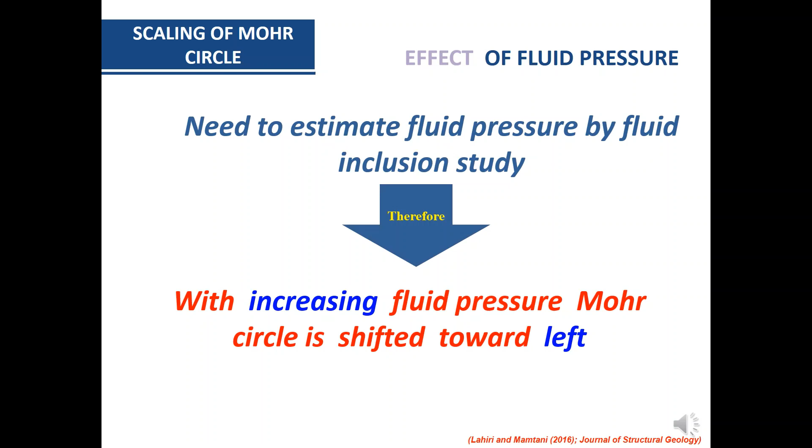Now in the next slide, we will discuss the second step, that is the consideration of Hoek and Brown failure criteria. Here we will discuss in a bit more detail.

The question is, why Hoek-Brown failure criteria, but not Mohr-Coulomb or Coulomb failure criteria? Coulomb failure criteria is for homogeneous and isotropic rock, but when we try to understand growth of any fracture or vein, we always need to consider rock mass. Hoek and Brown, in 1980, proposed two expressions based on lots of experiments on different types of rocks, known as Hoek and Brown failure criteria. This criteria is for rock mass, so it considers all sorts of anisotropy in the system, weathering effect, and other things. This is why we have considered Hoek-Brown failure criteria for this study, because fracture or vein always develops within the rock mass, not a purely isotropic and homogeneous system.

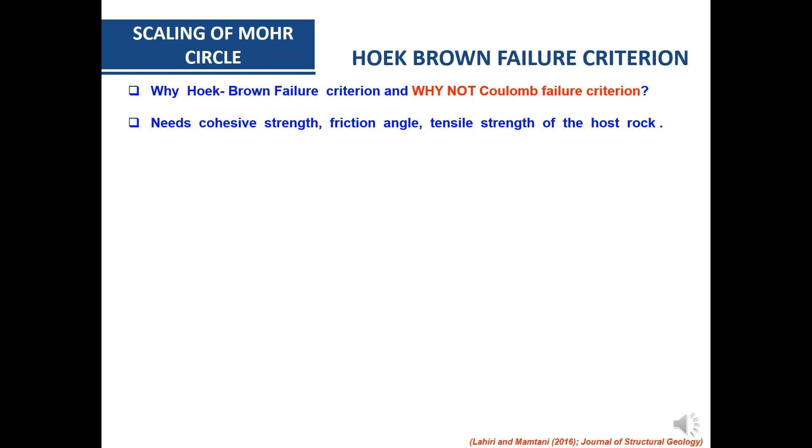Now, after determining the Hoek-Brown failure criteria, we need to know cohesive strength, friction angle, and tensile strength of the rock. I have already mentioned that for considering the exact expression for Hoek-Brown failure criteria, we need to consider lithological variation and differential weathering effect.

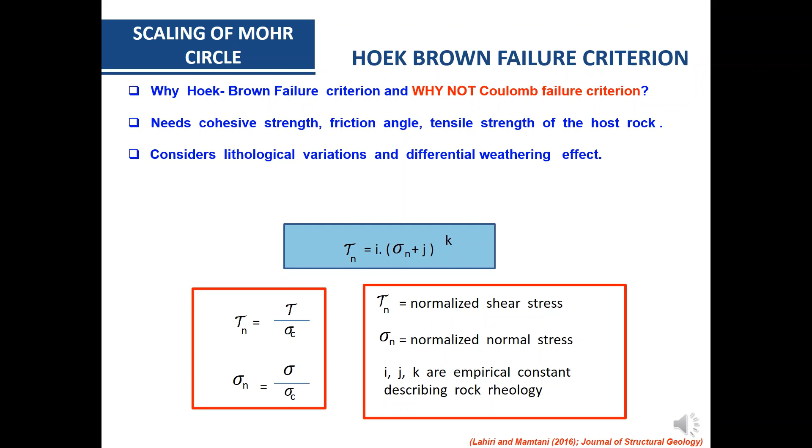In this slide, we will discuss fine adjustment: what are the different points of fine adjustment, how we can perform it, and why it is important. As we already know, R dash and phi, that is the stress ratio and driving pressure ratio, should always remain constant and should be maintained when scaling the 3D Mohr circle.

The second point is that poles of all veins should lie above the intrinsic rupture criteria. In our bachelor's and master's studies, we learned that when the Mohr circle touches the rupture criteria, we get fracture or vein. Now in the natural system, we are already getting veins, meaning these are already fractured and then fluid came within them. So the structural features we observe at the surface are already fractured. So if we plot the pole to this fracture or vein, this pole should touch the rupture criteria or lie above it. That's why this second point is very critical for fine adjustment.

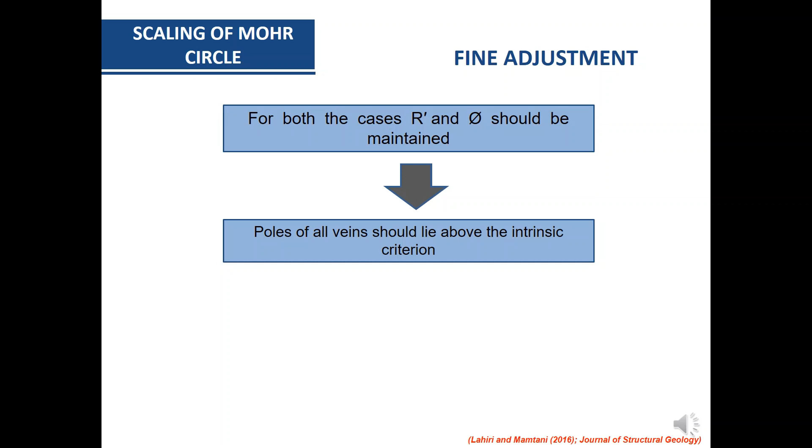The third point is, as we already know, to open a fracture, fluid pressure should exceed the normal stress. If fluid pressure does not exceed it, we will never get veins. But at the surface we are getting extensional veins, so we can say that during formation, fluid pressure must have exceeded the normal stress. So the normal stress corresponding to the reactivated fracture or the obtained vein should lie above the rupture criterion. These are the three points we should always remember for fine adjustment, to get the absolute value of differential stress.

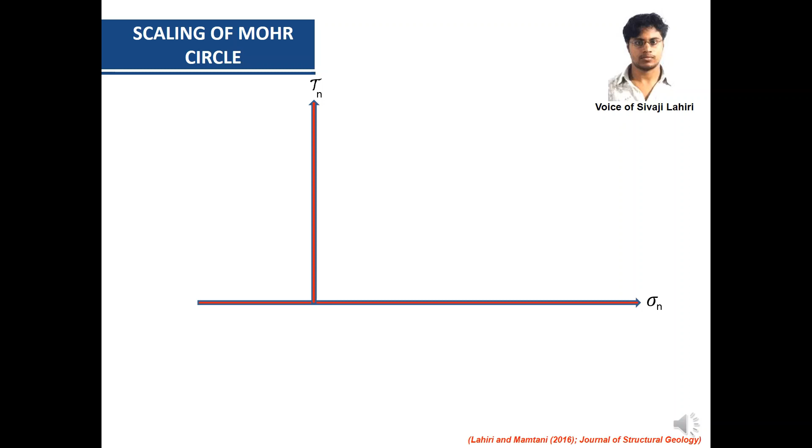Here we will show in animation how we can scale the 3D Mohr circle, all three steps, and ultimately how we get the absolute differential stress. First, this will be our normal stress and shear stress axis. Once these are known, we go for determining the Hoek and Brown failure criteria. Once this failure criteria is known and plotted on the sigma n and tau n space, the entire axis or entire system will be easily scaled, already scaled.

So once these are done, this will be our fluid pressure line, because as we have already discussed, with increasing fluid pressure the Mohr circle shifts toward the left, and the shifting will be equal to the amount of fluid pressure.

So then obviously the fluid pressure line will come to the 0th position. We already know theta 3, once this is known from the orientation of the veins, already discussed by Dr. Tridib Mondal. So this will be our angle 90 degrees minus 2 theta 3. We can draw a line here, and once this line is known, we can draw a circle considering this radius.

And again, from phi or from the stress ratio, we can easily determine the exact position of sigma 2 or sigma 2 dash. Once the sigma 2 dash value is known, we can draw the other two circles or other two planes. So this will be your sigma 3 dash position, this will be your sigma 2 dash position, and this will be your sigma 1 dash position.

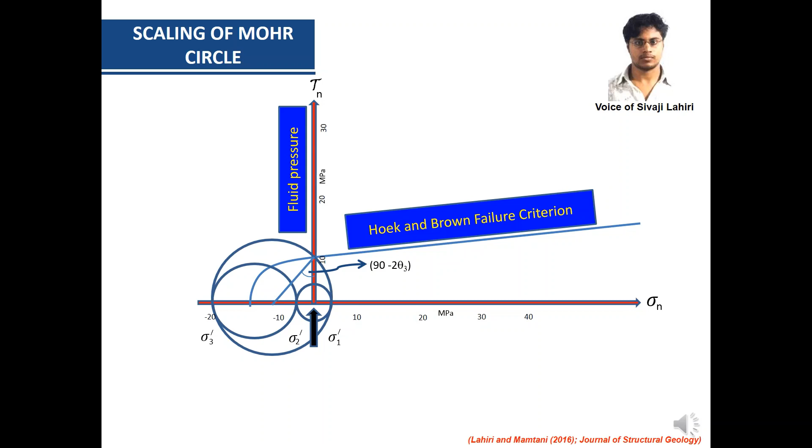As already discussed, sigma 1 dash means this is actually sigma 1 minus PF, where PF is the fluid pressure. So if we add the fluid pressure with sigma 1 dash, we get the absolute sigma 1 value. Once all of these things are done, we need to go for fine adjustment, the steps of which are already discussed in the last slide.

If these are known and fine adjustment is done, then we can estimate the absolute differential stress, sigma D. Sigma D will be the difference between sigma 1 dash and sigma 3 dash, and you can see sigma D is nothing but the diameter of the largest circle within the Mohr space.

So in brief, in a particular region, if we have extensional quartz veins, we can develop a 3D Mohr circle using Jolly and Sanderson's idea. Once this Mohr circle has been constructed, we follow these three steps of scaling the 3D Mohr circle, and finally we end up finding the sigma D value, the absolute differential stress.

Now we have come to the end of our presentation. So what we have seen is the concept of stresses, the basic concept of normal stress and shear stress, the mean stress, deviatoric stress, and what happens if mean stress increases or if deviatoric stress increases. We have seen the anisotropic part and isotropic part of the stress. Then we have seen how to plot fracture data, vein data, or any plane data into the Mohr space. Then we have seen the state of stress condition, the failure envelope, and how to represent it graphically. And we have also seen the Mohr circle in three dimensions.

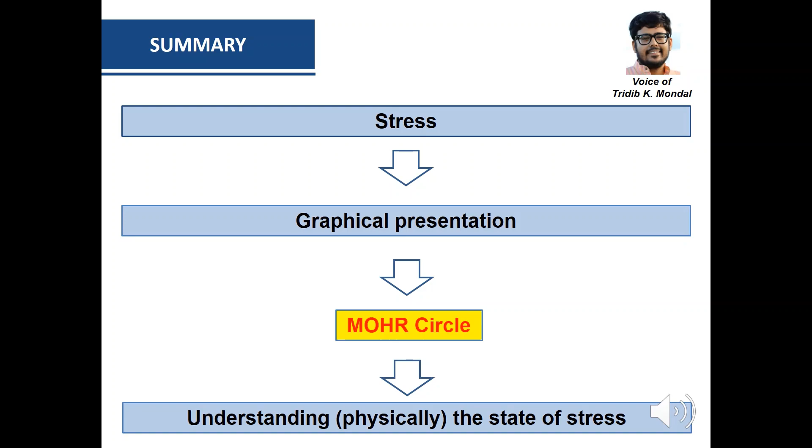I hope that you have enjoyed the presentation on the Mohr circle made by Tridib and Sivaji. Finally, some concluding remarks from my side. It was mentioned at the beginning of the presentation that this TecTask workshop was held at IIT Kharagpur in October 2016, while this recording has been done in September 2020.

A lot of new work has been done since 2016. As promised in my introductory commentary, I am now including a final slide listing some of the recent studies dealing with the Mohr stress circle and its applications in structural geology. There are many more, but I am listing only those in which the present and former team members of the Fabric Analysis Lab, IIT Kharagpur, were involved.

I have been fortunate enough to have had a very active team of researchers in my Fabric Analysis Lab at IIT Kharagpur. There are many more members than what you see here. However, with specific focus on the Mohr stress circle and its applications in structural geology, these five researchers did a lot of work, and together we published a large number of papers, mostly in the Journal of Structural Geology, Tectonophysics, and a few others.